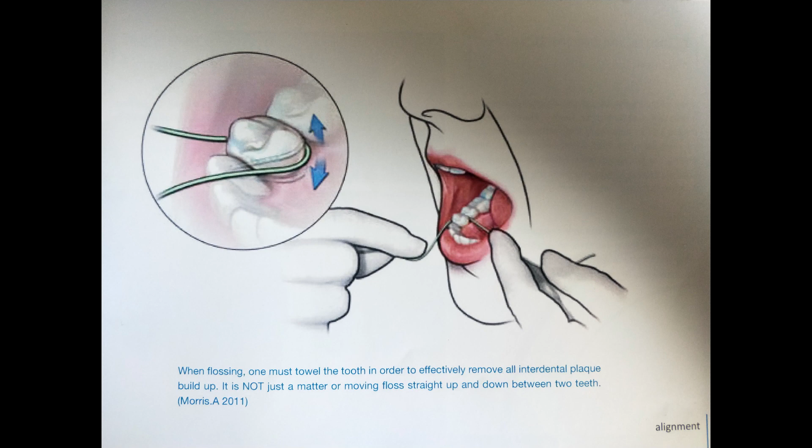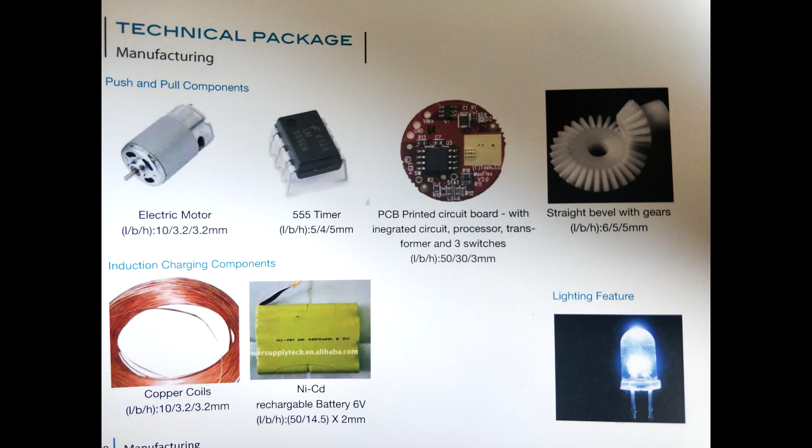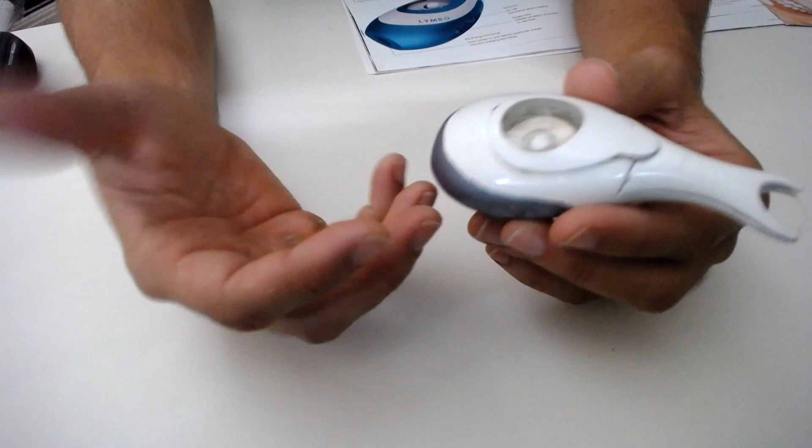Looking at the initial concept and idea of this project, it actually came from a friend of a friend who had done some kind of project at university, coming up with a product for an industrial design project. I don't want to talk too much about her work, but she put together quite a good range of work on a concept of such a thing, and did a rough aesthetic model and some drawings. When she approached me, she actually had this model of it, which wasn't a functional unit, but demonstrated the concept and the form of the idea.

Her initial idea was to have a roll of tooth floss in the center here, which would be replaceable. That would feed up in such a way that it would loop around and pass through this top here. The idea was to have a motor in here that would rotate this round, and the floss would run around, and then you would put that between your teeth. The power button would just be on the side, and you would have a light somewhere here, a little LED to let you see what you're doing inside your mouth a bit easier.

The problem I had with this idea was that I didn't think it was very hygienic, because obviously you could have a lot of gross and dirty stuff in between your teeth. So as the floss would pull that off, it would pull it back inside the device. At the time she approached me, I was actually working as a research engineer in a medical device company that specialized in infection prevention, and they made devices that would sterilize and disinfect medical equipment.

I was just thinking, if you had something that was pulling bacteria inside these small channels, it would create a lot of biofilm and just get dirty over time. It wouldn't be something you'd want to continuously put inside your mouth.

I had to think about it, and initially I didn't think it was really a good idea. I wasn't that keen to work on the project. But I thought about it a few months later and thought, why not? May as well give it a go. I had some spare time on my hands.

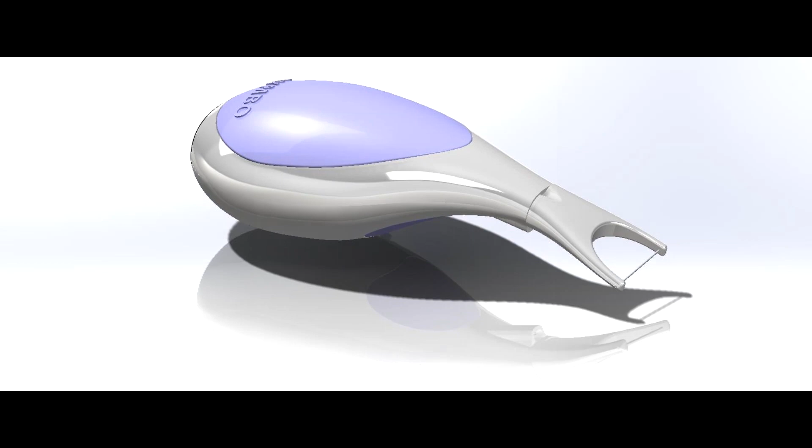But I thought, it's one of these things you don't really know if this kind of product would sell until it's on the market, and a lot of it depends on marketing as well. So I thought, why not give it a shot? I hadn't invested much money or time into it so far, so I was quite optimistic at that point.

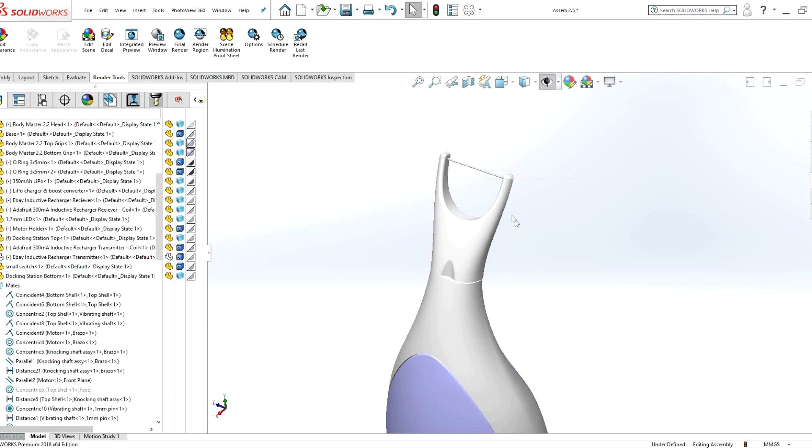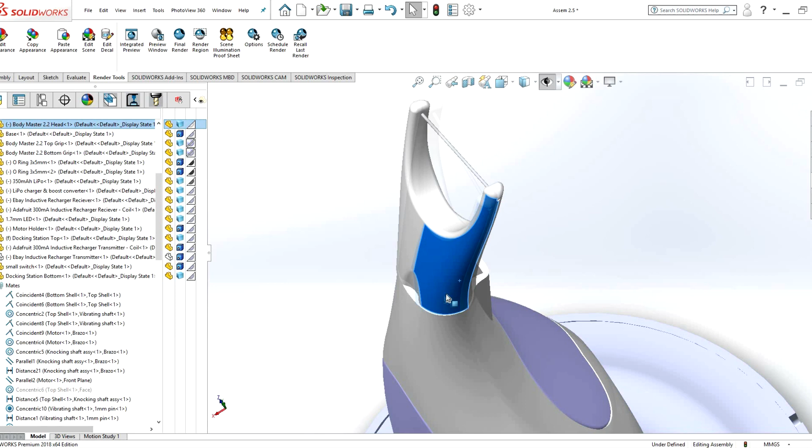When I first started, the first fundamental step was thinking about how I wanted the mechanism to work. As I said earlier, the form was given to me by a friend of a friend, and I decided I'd have a removable head that would vibrate roughly like this, just back and forth, minimal vibration. One thing you couldn't see on the prototype I showed earlier was the actual floss embedded in the replaceable head, which was difficult to prototype. I did actually prototype it, but I don't have that model anymore - I'll talk about that in a bit.

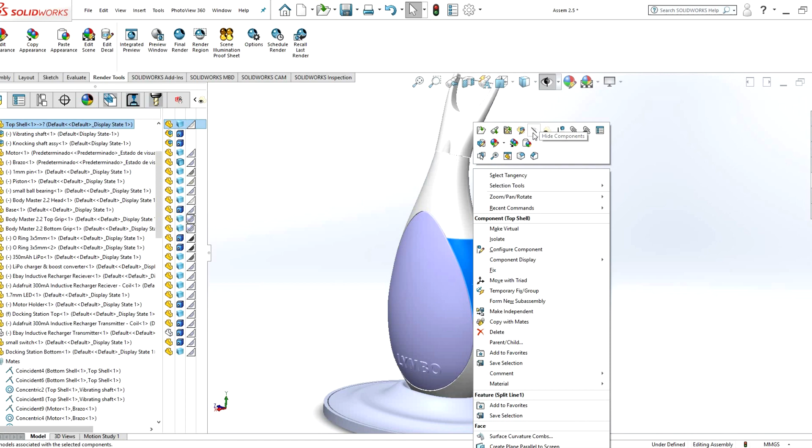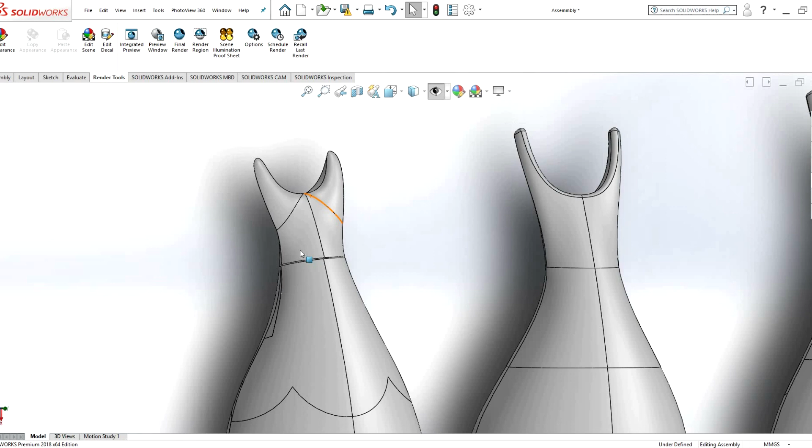Before I get to this final model, which has all the internal electronics and whatnot visible, I'll go back a few steps. First of all, I started with modeling different shapes and forms. This unit on the left was one of the first models I did, which had the rough idea of how I wanted the mechanism to work.

But this doesn't look as nice as the final units. With general design and engineering, you go through a range of iterations, and each unit gets progressively better until you get to a point where you're satisfied with it.

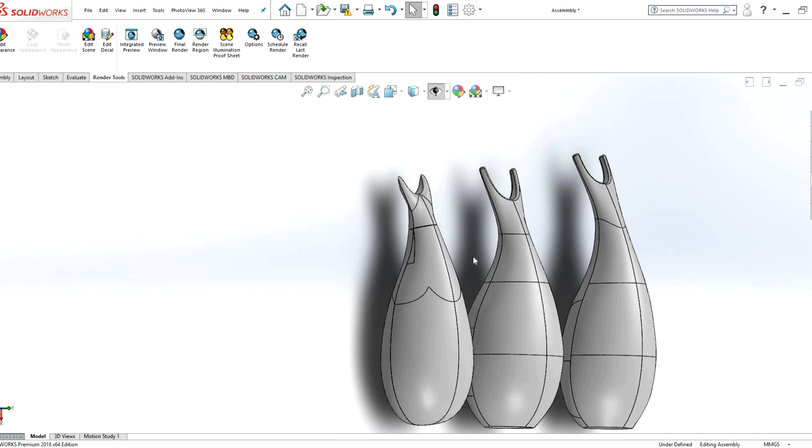So from this early stage on the left, I went to a more streamlined unit in the middle, but it was still quite round and big and just looked a bit inflated. Then I ended up getting to this unit on the right, which is more representative of what I wanted to go for.

Because this thing needed to be quite small, I needed to work with small components. So to determine the actual size of it, or the ideal size it could be, I had to first figure out what components I was going to work with.

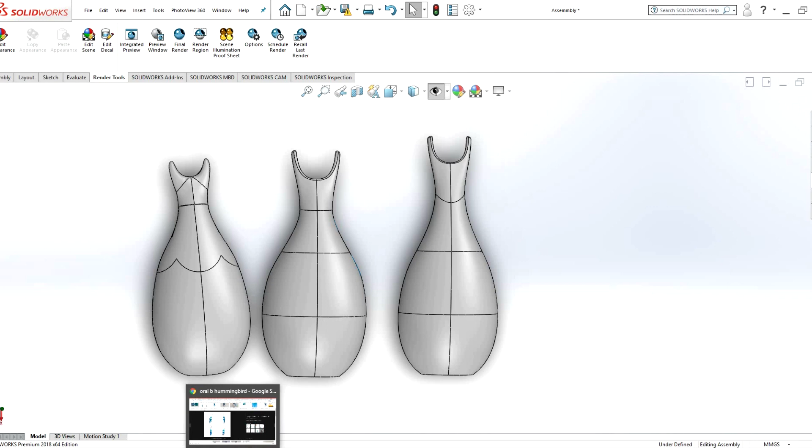So I knew I needed a little motor for the vibration mechanism. I was copying the vibration mechanism that I'd found in an electric toothbrush. I encourage people in general, if you're a tinkerer or an engineer or designer, to open up mechanisms out there and have a look what's inside.

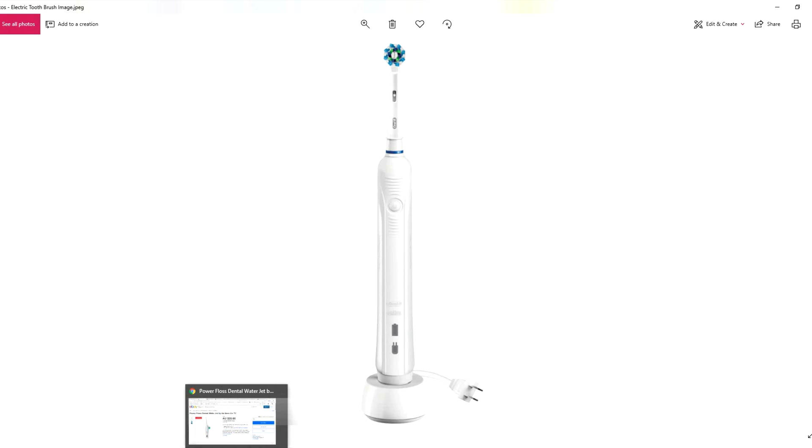So to find the motor, I was looking for micro motors, the smallest motors I could get, and I found this company, Pololu, that makes a range of small motors. I decided what voltage and gear ratio I needed and ordered a few of these and then modeled them up so I'd have an idea of their size.

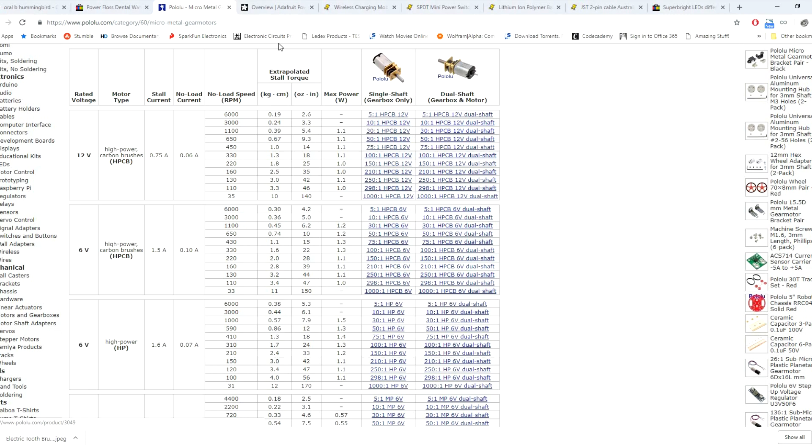I also found some other components. Some important ones were a small lithium-ion battery. I did some rough calculations of how long I would need this thing to last, at least like 10-15 minutes, ideally longer, so it doesn't have to be recharged in between each use. But I found that 350 milliamp hours was suitable. So from there, I ordered one of these and got the size and dimensions.

I also had to get a little power board, which is essentially like a power regulator, a power supply. So you plug the battery into this and then plug the motor into this, essentially.

I also found some little wireless charging units. These things were quite cool. Essentially, they're two copper coils, and through inductive recharging, you can basically place one of these coils on the other. One will be connected to a power supply, the other to a little recharging board, which then plugs into your power board. They can be separated by up to 5 millimeters, half a centimeter.

One of these was sitting inside the unit and the other was sitting inside a little recharging base or a docking station. Some other basic components were just power switches, some cables with connectors, some little LEDs. As I mentioned earlier, there was a little LED in the device.

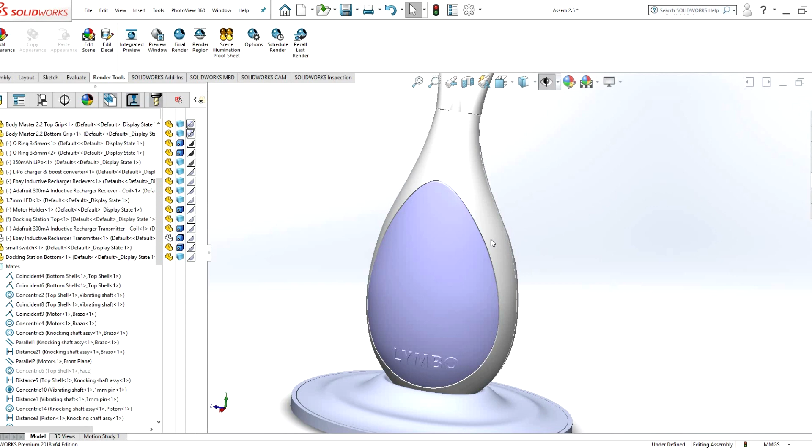So once I'd ordered all these things, I did a model of them in SOLIDWORKS, and from there essentially started making the size ideal. So again, this is an iterative process.

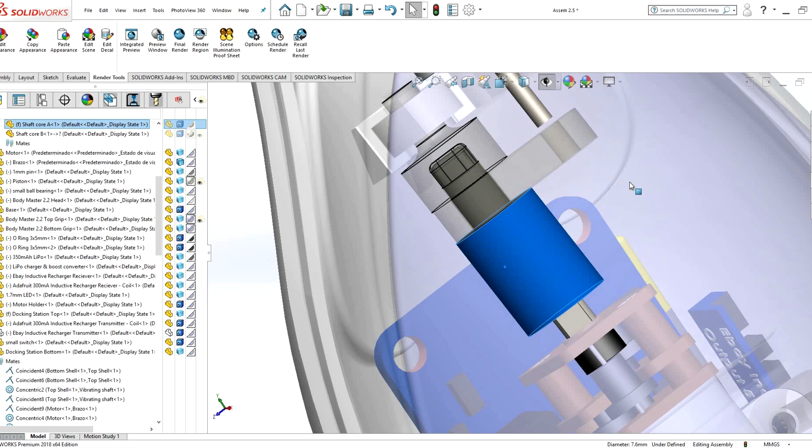This motor is attached to various little components. I'll quickly try to explain it here, but this shaft on this piece is offset from the center. So as it rotates around, it's not staying in the center. If you can see that there, hopefully.

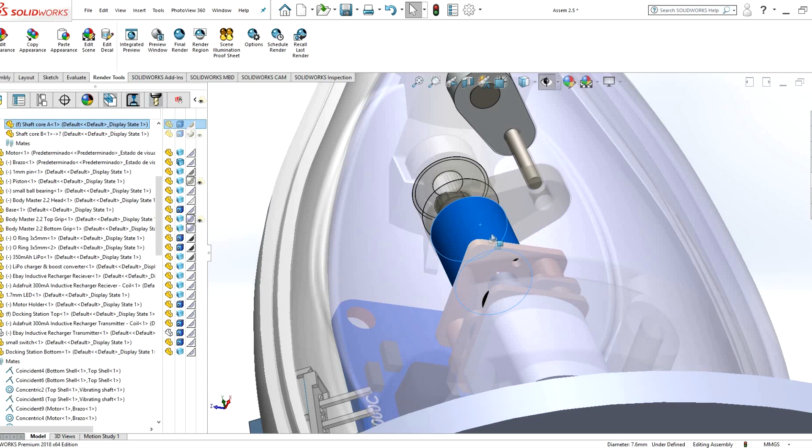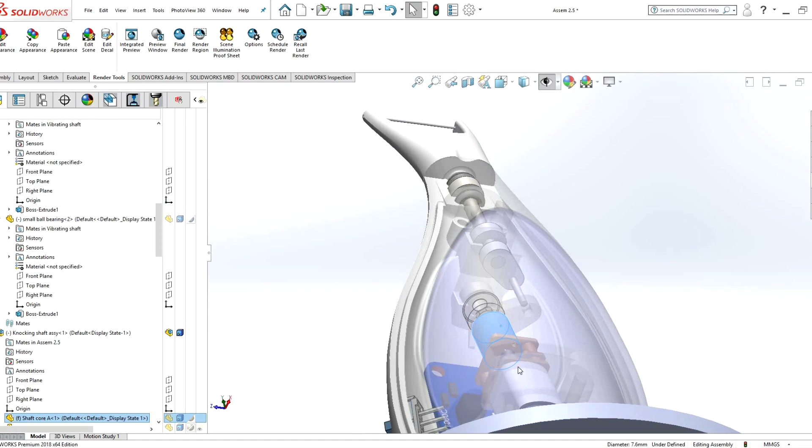And what that does is this little cam piece that's connected to it swivels back and forth, if you can see that. Then this little steel pin is connected to this cam piece, which is connected to another arm up here, which is then finally connected to a shaft that the floss head sits on. So the final result is we get this vibration back and forth of the floss head, which comes directly from the rotation of this little micro motor here.

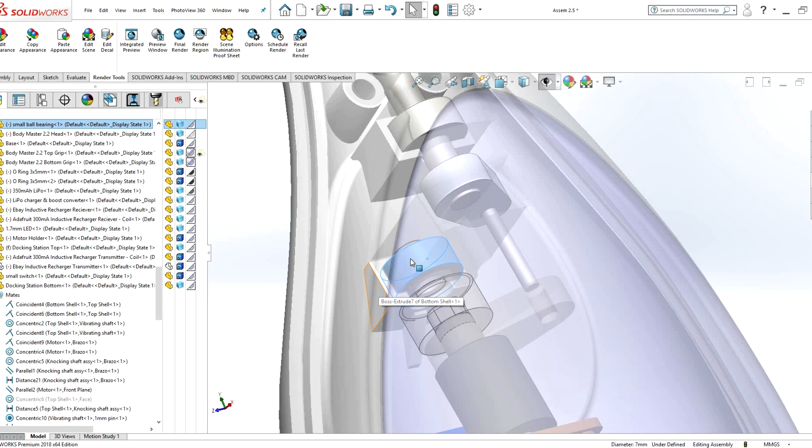So these pieces here are just some little ball bearings that contain the unit. The ball bearings are quite necessary to help keep the unit stable and secure, and also minimize friction. So we don't want the shaft just sitting on a piece of plastic that it's sliding against. We actually want it rotating in a ball bearing. And we have a couple ball bearings placed up here as well.

This design is by no means optimized. It was just a prototype, so it's not ready for complete mass manufacture. And I put a couple O-rings in there to try to help keep it watertight, but that would have required a bit more development to get it to a robust level.

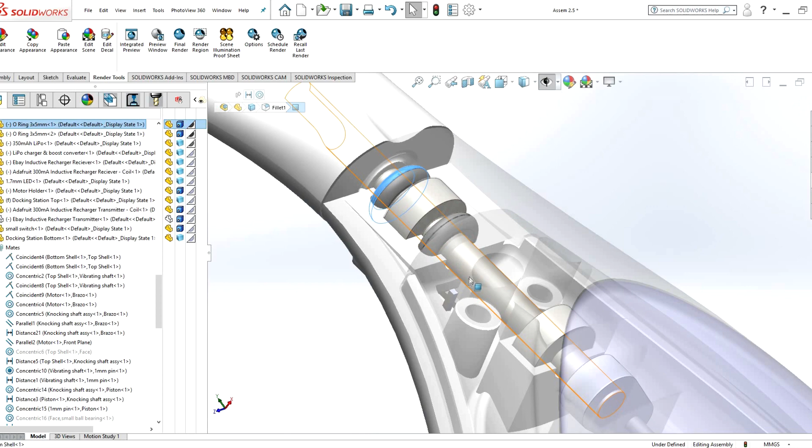The LED was positioned here. I'll just change the transparency of that. So yeah, that was sitting in there, and its wires were running along down to the main circuit board. I'll also demonstrate this on the real model shortly.

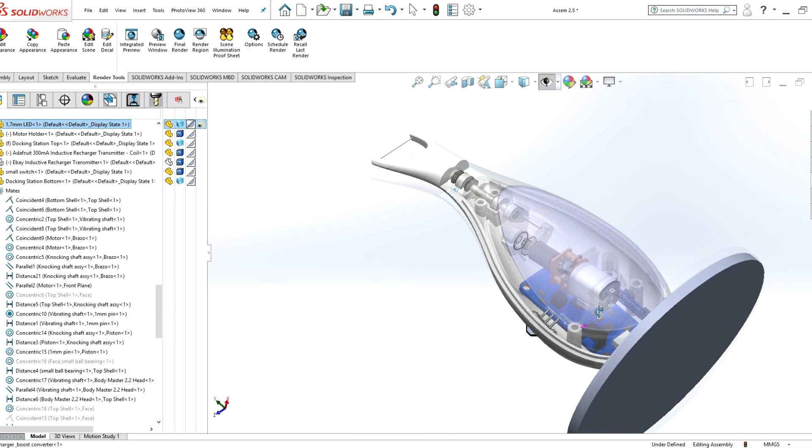If I change the transparency of this piece, we can see that the lithium-ion battery is sitting at the base of the lower half of the unit.

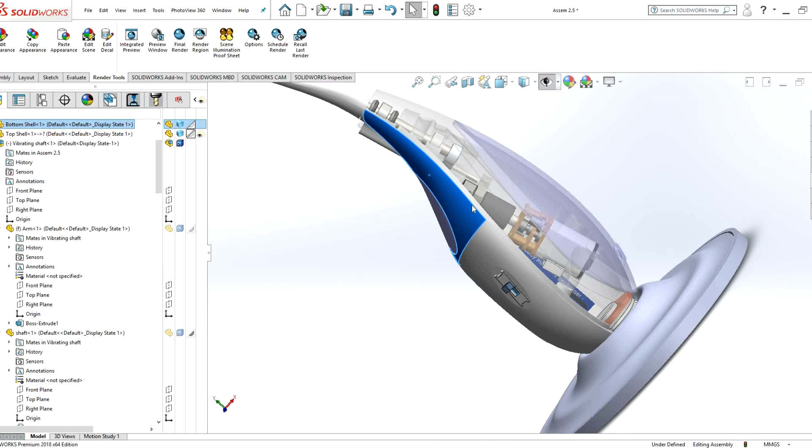So, sorry, also these things are split into two halves. If I open this component, this is the bottom half of the piece. We can see the little mounting features for the ball bearings. These are sort of just some cylinders. I call them alignment guides.

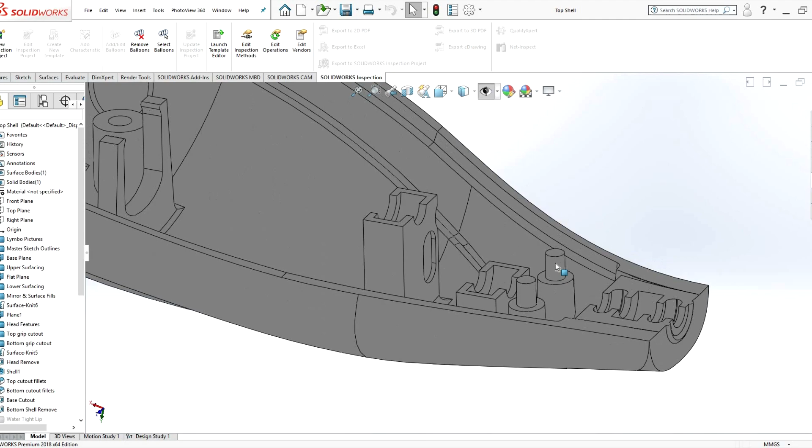And if I show you the top piece, it will make a bit more sense. So the top piece had the male equivalents, so they would sort of lock into place. I think my plan for securing the prototype was to just put a few drops of super glue on the male alignment guides, and then they would bond with the other piece.

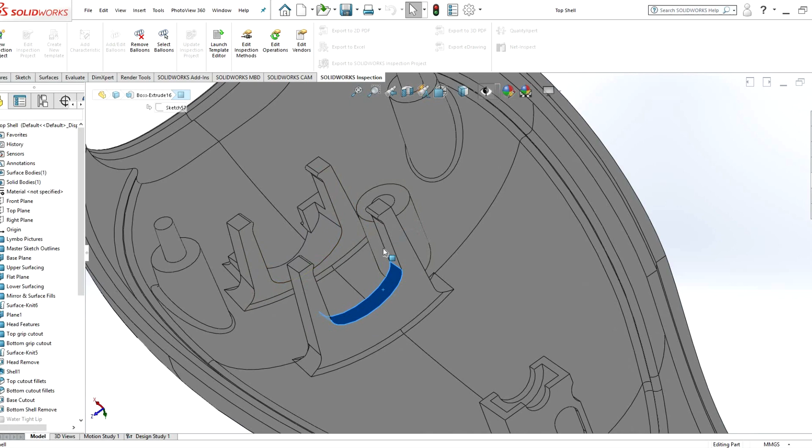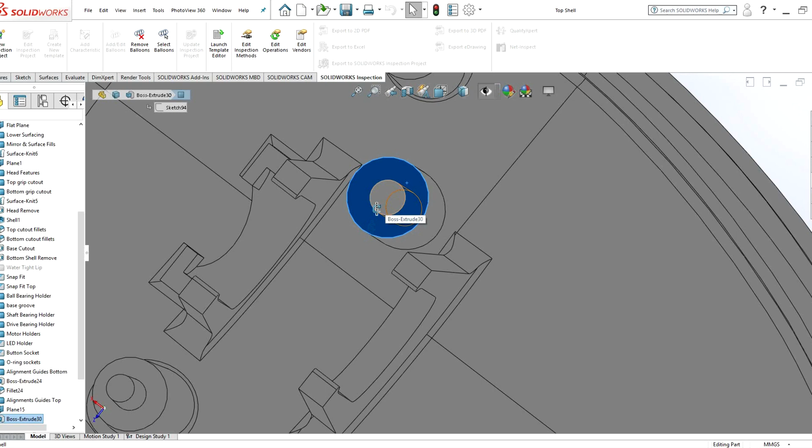These pieces here, they were actually little mounts for the micro motor. I was sort of trying to design them so they would be kind of like a snap fit. If you can see these little lips on here, when you push the motor down into place, these arms would extend outwards and the motor would snap in. But yeah, that by no means is the only way to do it. I think also this was a little feature to place a screw in to more firmly secure the motor in place.

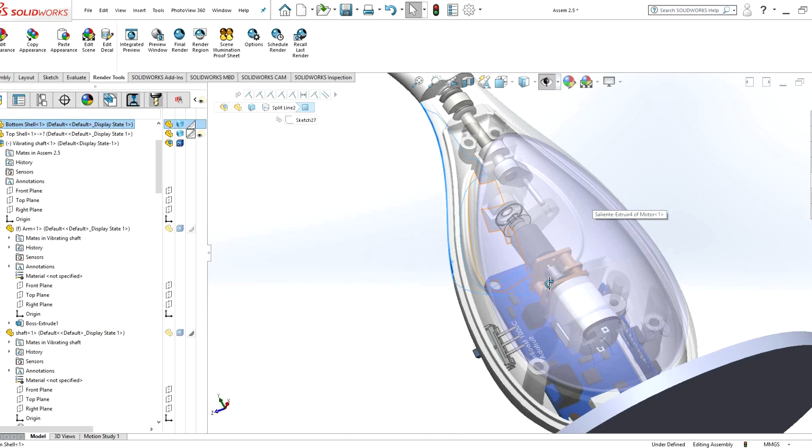So back to the full assembly. Now this is sort of like where it ended up. It took me a little while to get to this position. So essentially I would have my rough model, and then I would manipulate my components and place them in different sections and see if everything would fit. Do interference checking in SOLIDWORKS.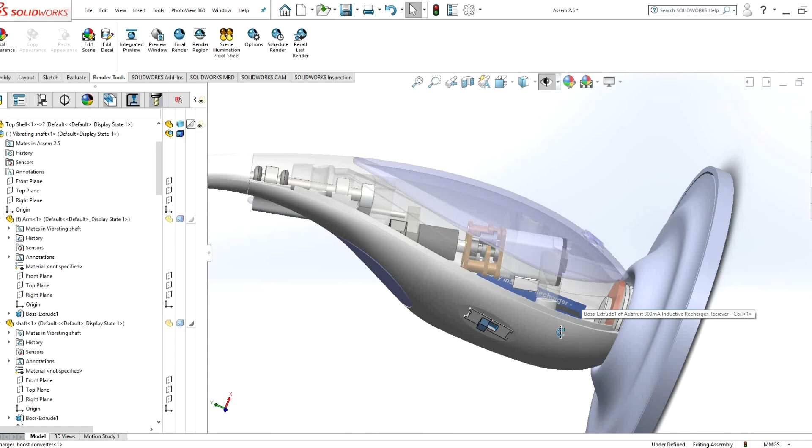I might demonstrate that in some other videos later on. And yeah, it was just like an iterative process. So maybe one day I would make sure that the motor would fit in place. And to do that, I might have to extend the length of the body and whatnot and manipulate the width and the form, till eventually I got to a point where I had everything in there.

So this was just a little power on and off switch. This down here is the coil for the wireless inductive recharging. And this was the little circuit board that came connected to the coil.

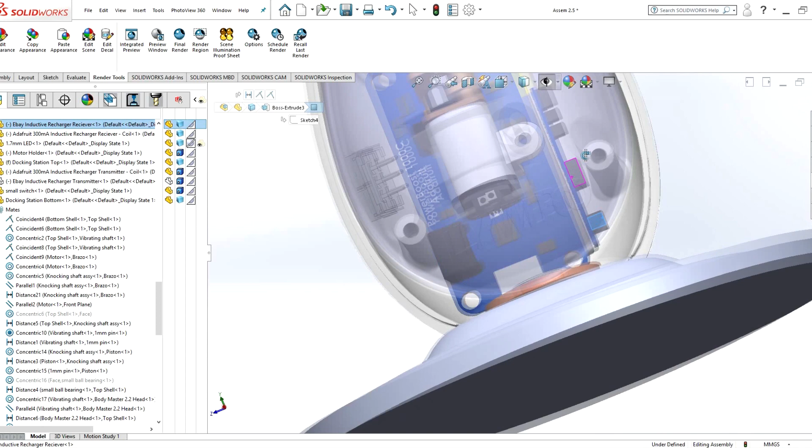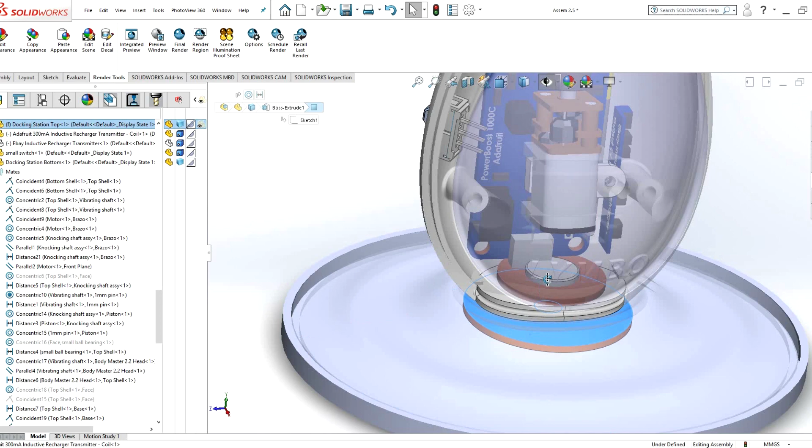Besides that, there was this other piece on the bottom, like a third part of the body. That probably in hindsight wasn't necessary, but it was just one way I went about designing it. And finally, I had this base piece. So the base piece also had the other recharging coil in there, which was wired to a power supply.

So essentially, when you place these things next to each other, the thing would automatically recharge. Compared to the Oral-B Hummingbird, the other flosser that was on the market, that was just powered by a single AAA battery. I did actually order one of those Oral-B Hummingbird units off eBay. Some people sell some old stock, and you can see that the price is quite crazy now, $150 US.

And upon opening this thing up, it was quite good, but one negative thing I found was that because it was just powered by a single battery that had this screw cap on and off, I think it wasn't completely protected from the elements or protected from water per se. And I found that the contacts on the battery weren't so good. There was a bit of rust and corrosion.

So that possibly could have been an issue with this unit, and perhaps they didn't want to redesign it, so it was more cost effective for them to discontinue the model.

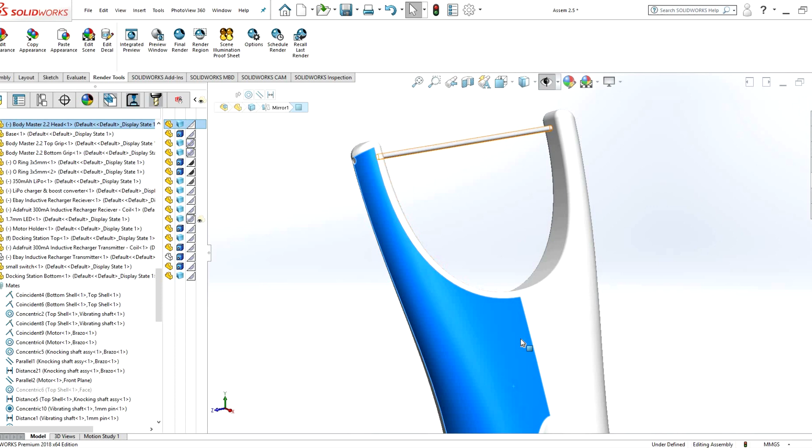So yeah, a couple more important points. The removable floss head would be a disposable thing, so they would just clip on and off as discussed before, and the floss would be embedded in the plastic. So the idea was that when these pieces were injection molded, the plastic would be held taut in the mold and it would sort of flow over it. I think that's commonly done in disposable floss picks.

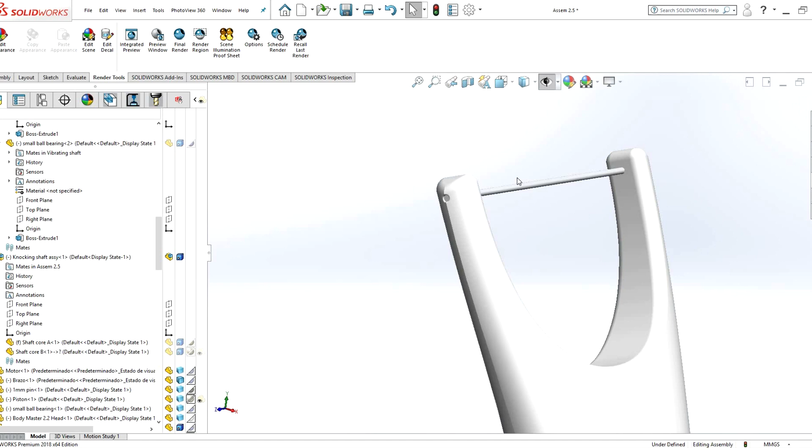To prototype that, it was kind of hard. I think what I did was with one of my 3D prints, I drilled a tiny 0.6 millimeter hole and fed the floss through with a knot on one end, and then on the other end tie together another knot, but it didn't really end up being super tight.

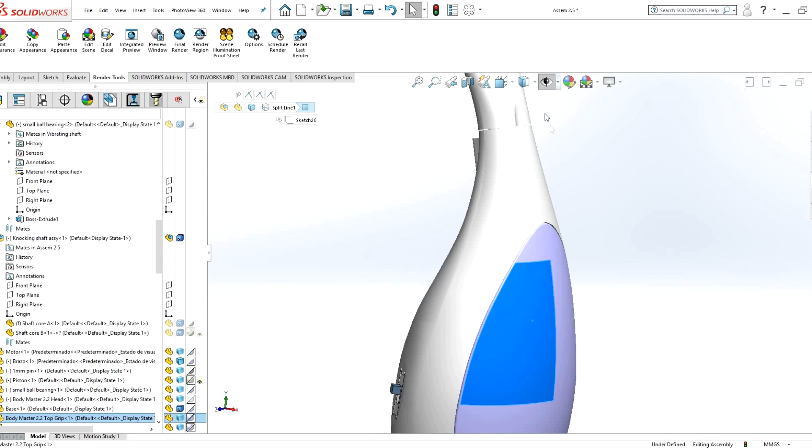These are blue pieces, some little silicone grips. If I open one of them, you can see it was sort of like a shell shape, made out of a rubbery silicone material to give the unit a nice feel. If I open up the top shell, on the exterior surface we can see this big recess, this big indentation where the seal would sit.

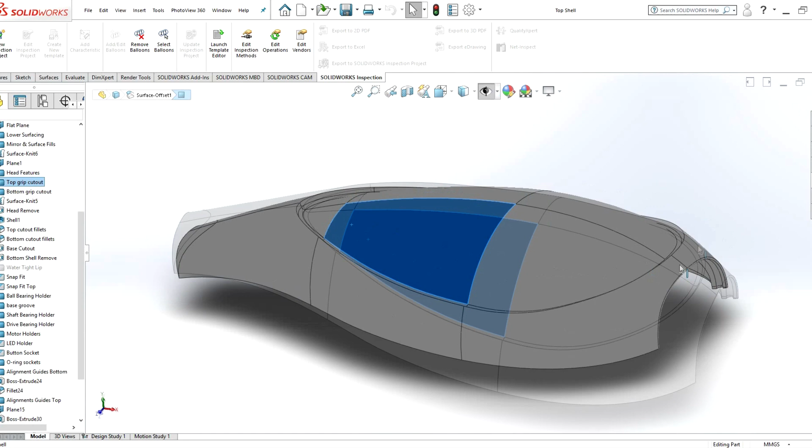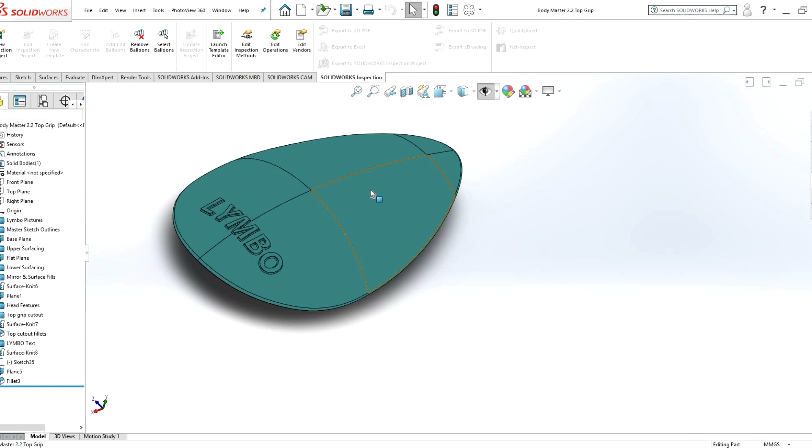To actually make that, I made a mold which was the inverse of the silicone grip. Then I bought some silicone mixture with some blue dye, mixed it together, and injected it into the mold. That probably deserves its own video of how to do that, so subscribe to the channel and in the future I'll make a video on how to make silicone molds.

If that was going into mass production, that would just be overmolded in the plastic injection molding process, which is a technique of combining a softer material onto a harder plastic. I produced some renders of this unit — this is an exploded view of the model and all the internal components.

Some other images — I think this was another model where I was thinking of having the LED on top, but it turned out it was more useful having it on the underside of the model. Just some general pictures.

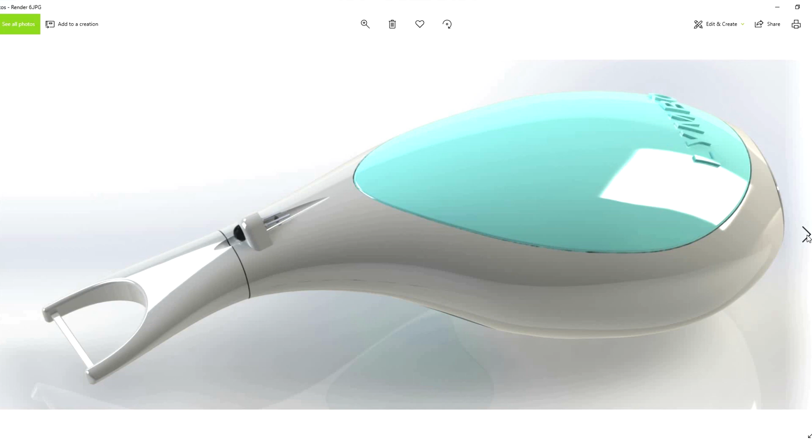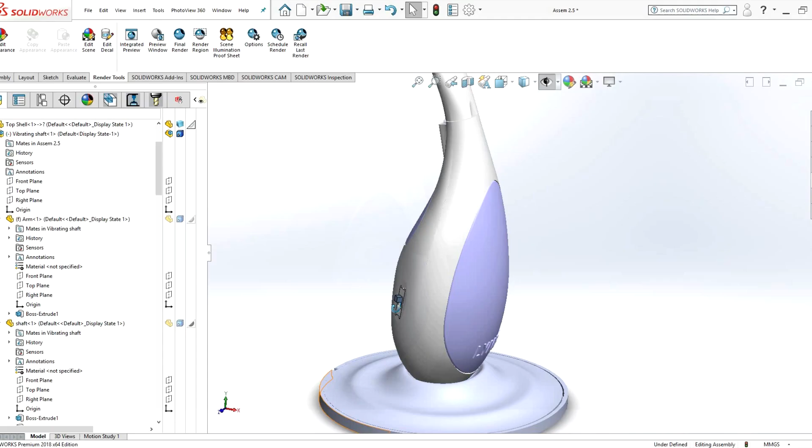I also did plan on having the power button to turn the thing on and off underneath the silicone grip or TPE grip, but that was more difficult to prototype. So for the initial prototype, just having a switch on the side, as shown here, was easier, and it didn't really detract from the overall evaluation of the concept.

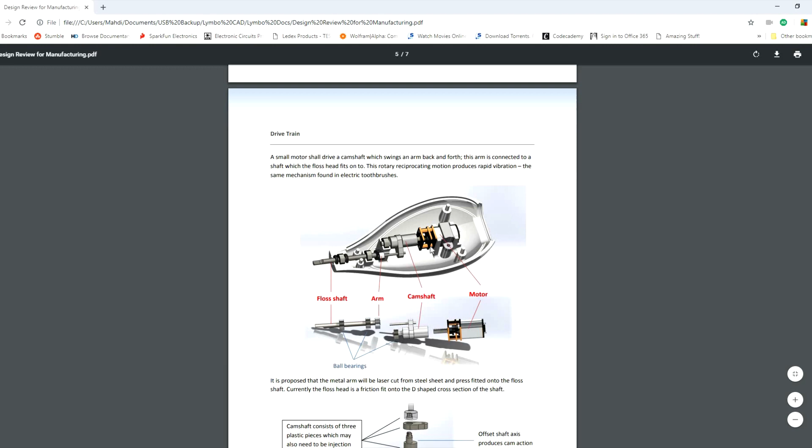I also had this document I put together, which was just kind of a design review for potentially getting this thing manufactured. I'll share that link in the description below if anybody's interested and wants to have a read. The plan was to get the pieces plastic injection molded with an overmold of the grip. It's just a brief document, so feel free to give it a read if you're interested.

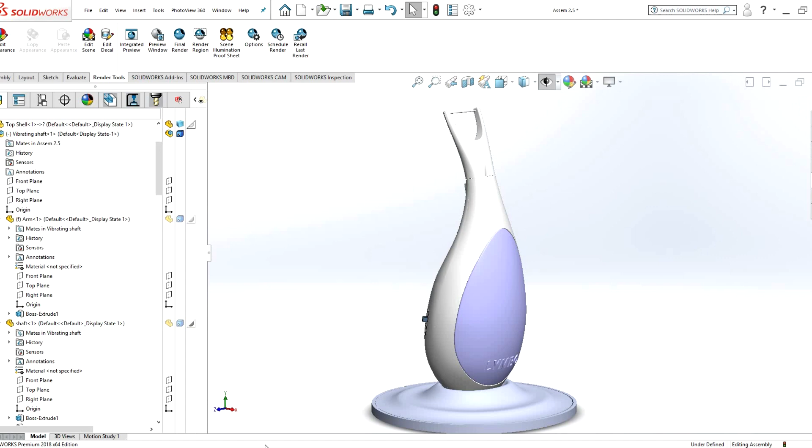So now talking about how I actually physically made a prototype of this, I decided to go with 3D printing. It's a quite useful way of rapidly prototyping small objects. I don't own a 3D printer myself, and I don't really have the space for it in my home.

But I was aware of this website called 3D Hubs, which, back when I used it several years ago, basically consisted of local people in your city or area that had various equipment like 3D printing machines or CNC machines. You would upload your designs, get quotes from various people, and choose the services you want. For this piece, I wanted it to be pretty high quality, so I decided to go with SLA or resin printing, which is also watertight and 100% solid. I uploaded my files, selected resin SLA print, and it would give me a quote.

So to get things prototyped is quite expensive. This actually looks more expensive than what it should be just for a single part, but I haven't really played around with the options here — for example, if you change the resolution it should be a little bit cheaper. But nevertheless, prototyping is always going to be more expensive per unit than final manufacturing. So all these pieces were 3D printed using SLA resin technology.

So I'll just take these apart in half there. Also, as I mentioned, the silicone grips — these were essentially a two-part mold that came together, and I injected the silicone inside, let it cure, and then took this out. I'll definitely make a video about doing this in the future and how to make it decent quality. The plan was to just glue them in place in their respective parts.

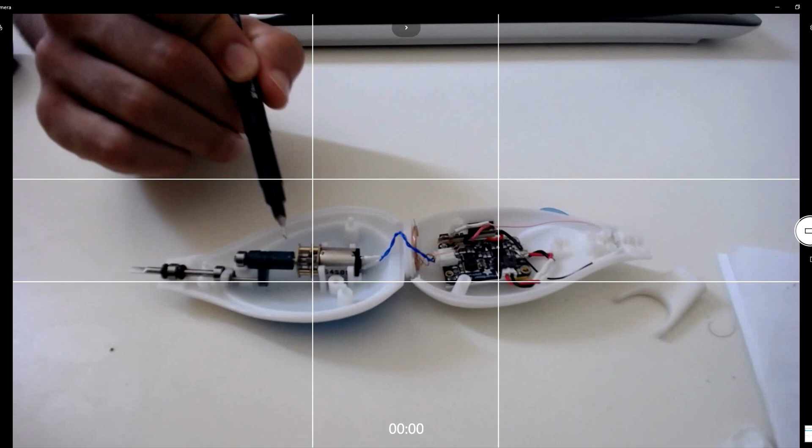Here we can see the little micro motor that's connected to the knocking mechanism, or the little camshaft, which drives this little arm connected to this steel pin on the shaft. Here we have the circuit power regulation board connected to the inductive recharging coil.

Underneath the board we have the lithium battery, which is not really visible here — I'll try, you can sort of just see the yellow tape of it there. And the micro power switch, and then little power leads running up to the LED. So these power leads here, and the LED is just positioned in there.

So if I turn this thing on, you can't really see it on the camera, but this shaft is vibrating. If I hold this metal pen next to it, you can hear it. Let me turn that off. And then when the head is in place, it causes vibration of this head.

As I mentioned, this would be permanently bonded together, but because this is a demonstration unit, I didn't actually do that. Let me clamp it back together.

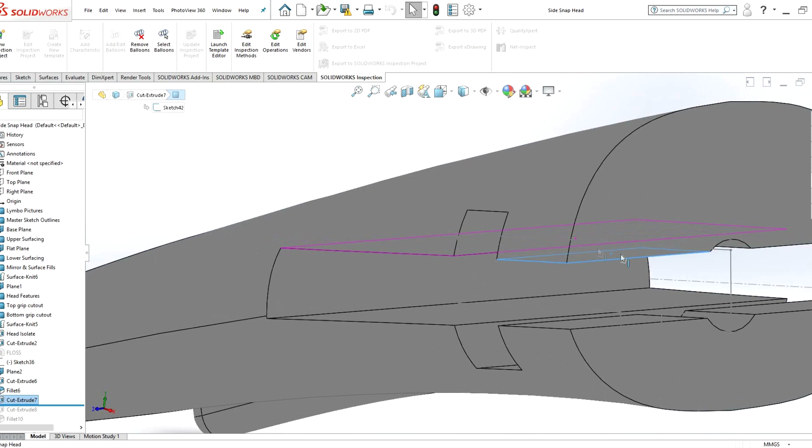So I began looking at a different style of design, one where the floss head would slide in sideways, and this metal shaft would have another solid metal piece bonded to it. It would be a snap fit mechanism, with a small channel that it would pass through to get on there. Once this was on there, any upwards or downwards pulling force along the axis of the shaft wouldn't pull this thing off, so it wouldn't get wedged between your teeth.

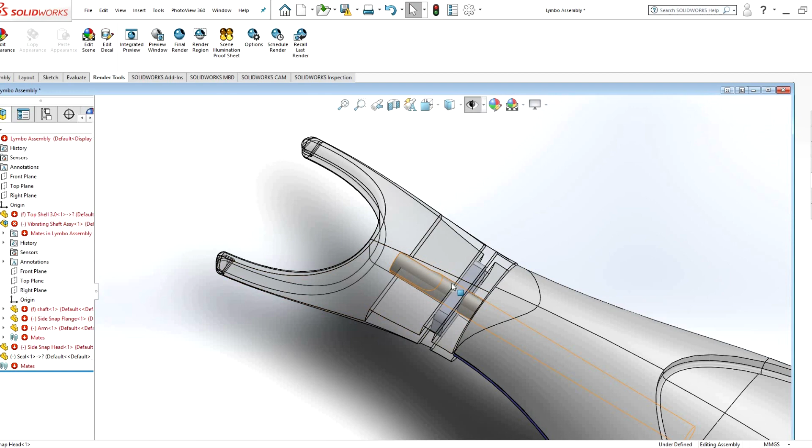And to get it off, you would just move this thing sideways, maybe use your thumb to pop it off. A lot of these snap fit assemblies need experimentation with the final material you're using and the manufacturing process. So this was just a concept, and I stopped working on the model around here, so I didn't develop this further.

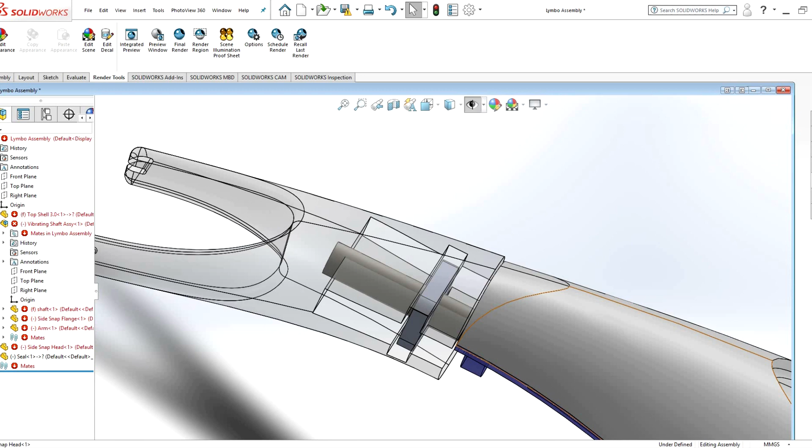I'll talk about why I stopped working on this and didn't take it any further. The idea was to put this thing on Kickstarter as a new, novel kind of product, similar to the Oral-B Hummingbird in the past. As I mentioned earlier, it seemed like there was still a desire for the Oral-B Hummingbird.

So I felt like I was at a level where I had a working prototype. I could have produced maybe 10 of these, maybe 20 by myself, but I could have gotten some other people to help me make more. I'm sure you know how Kickstarter works, but have a goal, and once we raise that goal, look to going into final manufacture with this thing.

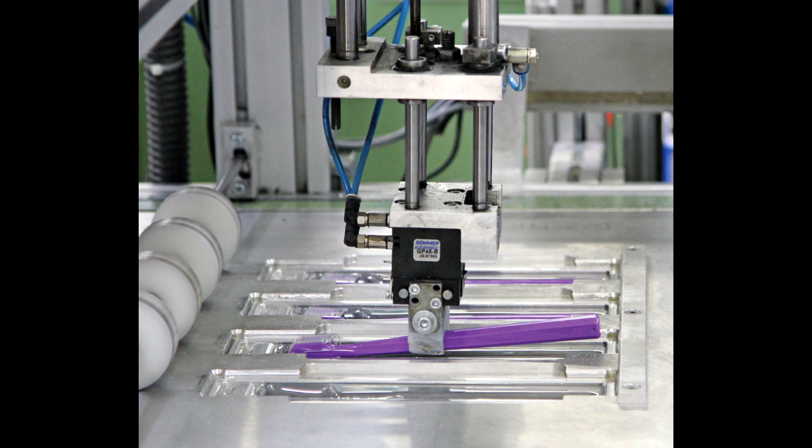To manufacture this thing, the plan was to go to China or approach some Chinese companies, talk with them about what they would think would be necessary design changes. The plan was to just use injection molding, with standard materials like ABS and whatnot.

So I started looking into medical device classification and regulation. Medical devices come in a range of classes. Class 1 being the lowest risk, things like tongue depressors, which are basically wooden popsicle sticks used to lower a tongue, all the way up to active implantable medical devices. So things like defibrillators, things that monitor your heart, or brain implants, very high risk things.

So obviously our higher classes have more scrutinized controls, and you need to meet a lot of requirements before those things can even be listed as products. Lower classes have lower controls, but there are still some things that need to be met, or standards that need to be reached.

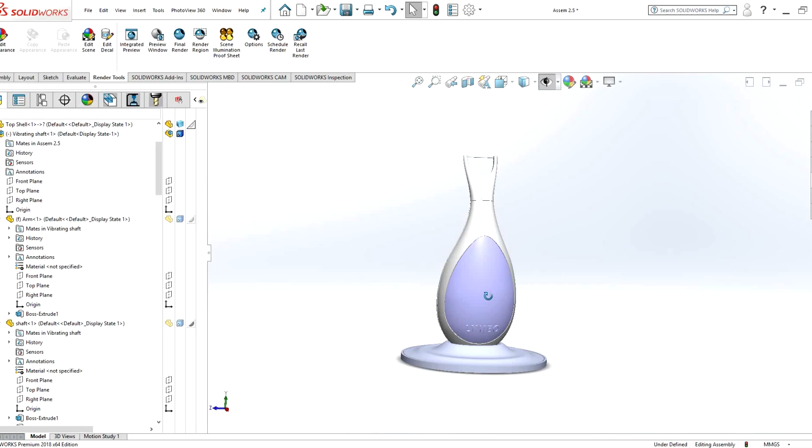So yeah, I just sort of decided that starting a small company with a medical device, even though this isn't a super serious medical device, it would be hard work, and you'd probably end up moving away from the design engineering side of things and more onto the quality control and regulation of it. So it's not to say that this thing couldn't be a real product out there.

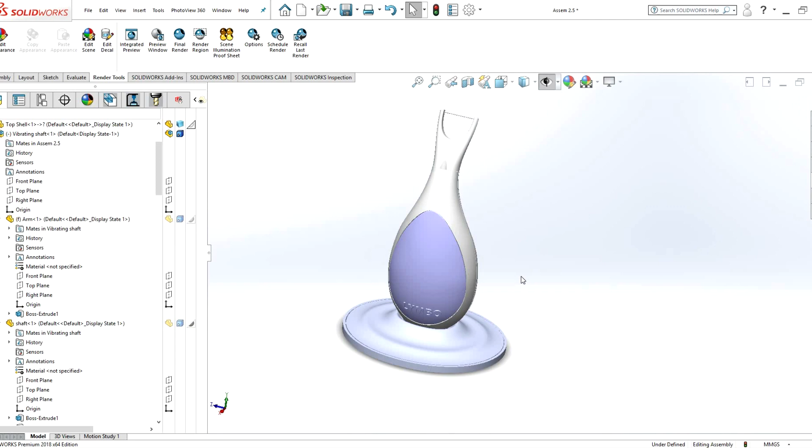But I think something like this, it would be a lot easier for an established company in the medical device or hygiene field, like Oral-B or Colgate, for example, to develop this because they would already have the company infrastructure to meet the requirements to sell this. Trying to do crowdfunding with a small medical device, it would be hard work at the very least, and it wasn't really the path I wanted to go down.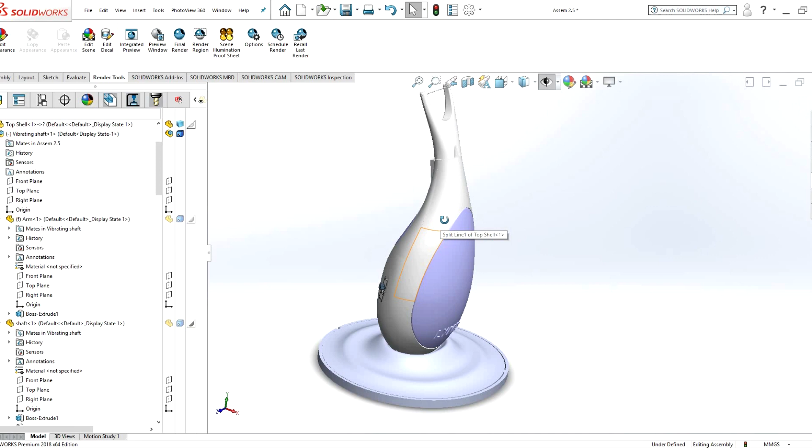But regardless, I learned a lot from this project, a bit about business and even just general Solidworks modeling. I'd never actually done any surface modeling, which I had to do to get all these smooth ergonomic shapes. If you want to learn about surface modeling, feel free to check out some of my other videos on the channel.